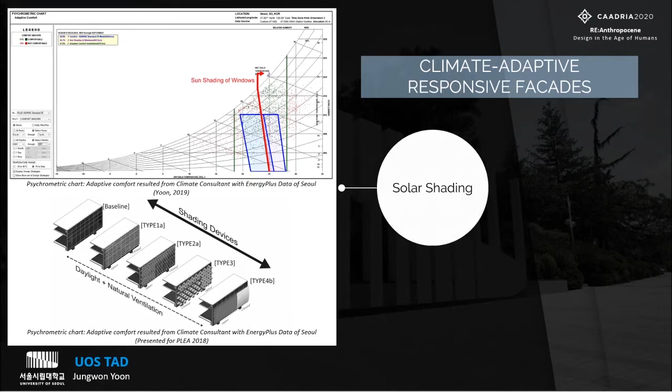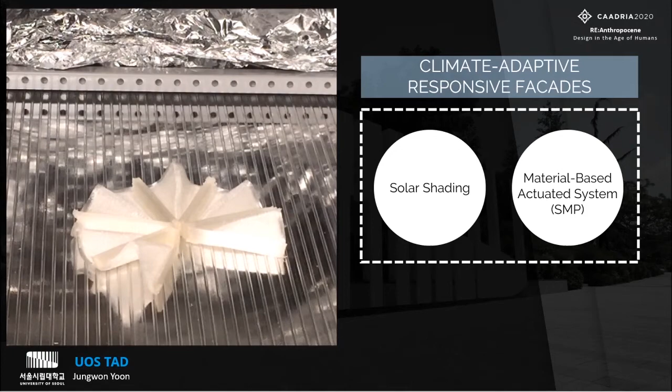The project started from the timely interest in climate adaptive responsive facades combining shading with a material-based actuated system in SMP. The basic principle is to apply SMP to the transformative shape-changing part. If the temperature rises above the specific transition temperature, the SMP becomes pliable and deformable to recover its pre-programmed shape. The pre-programmed shape is trained during the manufacturing process.

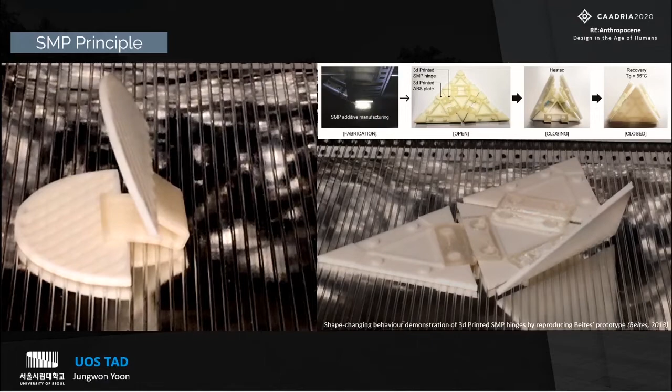In kicking off the project, we started the case studies of responsive facade design and categorized the examples into 4 types. The representative examples of 4 types were interpreted into SMP elements and experimented for 3D printing and behavioral tests. Of a number of prototypes, this study focuses on design and fabrication of SMP with a flapping mechanism resulting from bending wings. The first prototype is called blade.

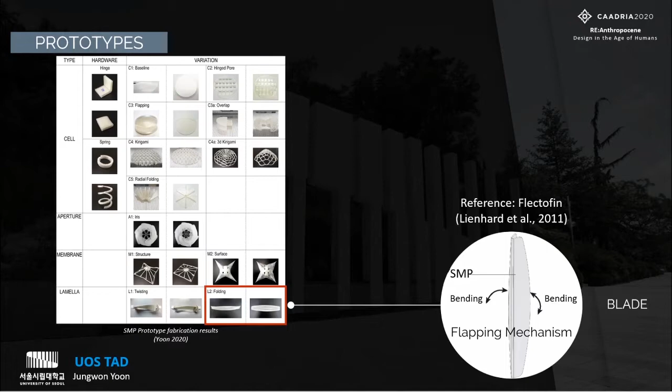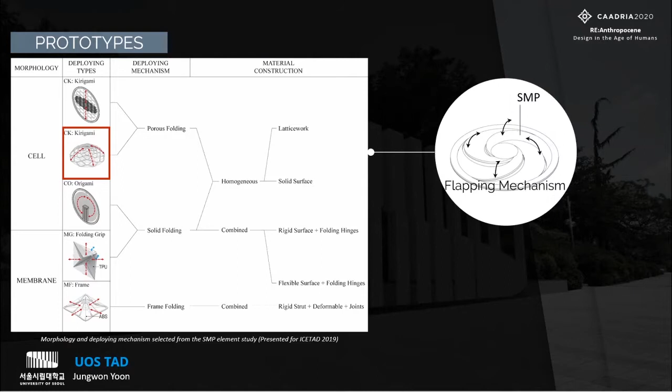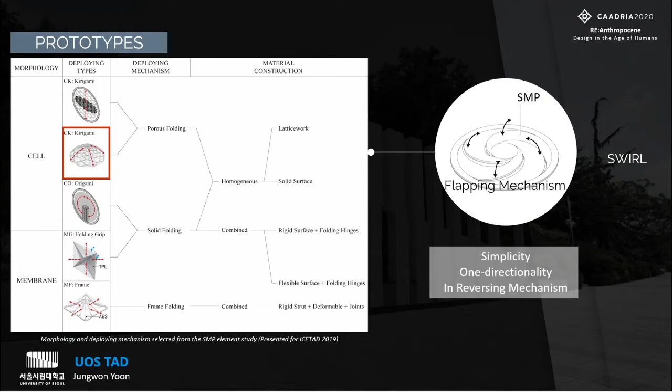Referenced from Flectofin, the second prototype is one of the deployable prototypes in various complicated geometries. The selected type named swirl is a radial arrangement of the 4 bending wings from blade. The design was selected due to its simplicity and one-directionality in reversing the closed shape into open positions. Therefore, 2 designs are discussed for the design to fabrication process and empirical and reiterative experiments.

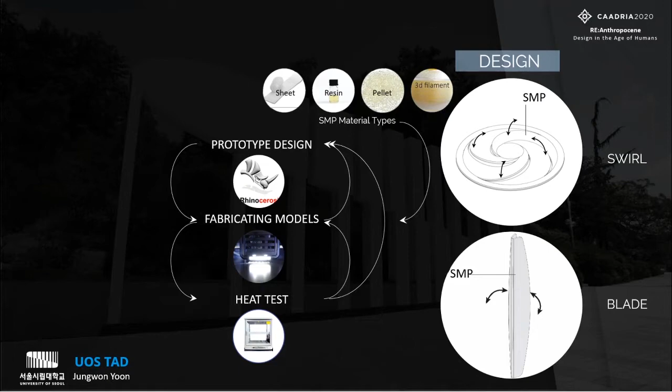In the process, the experiment results make us revisit the fabrication and design, while SMP material types also require recalibrations and procedural modifications. For rapid manufacturing and prompt feedback between design and fabrication, 3D printing was undertaken to fabricate SMP components. Cubicon Single Plus was used in our experiments.

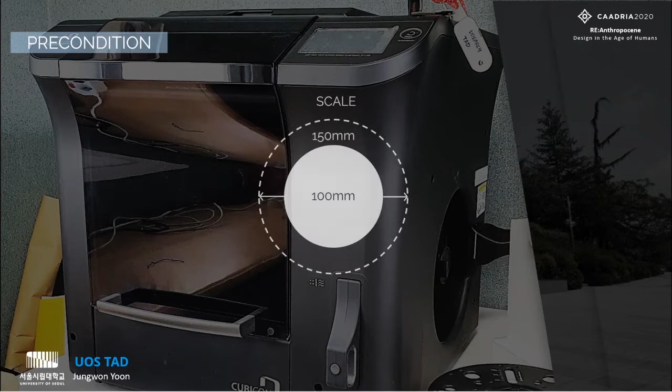SMP with different glass transition temperatures were tested for 3D printing. Also, the filament manufacturing process with SMP pellets was involved. Additionally, enlarging the printing size was another challenge to take. In the early stage of additive manufacturing, the commercially available filament in MM5520 was used.

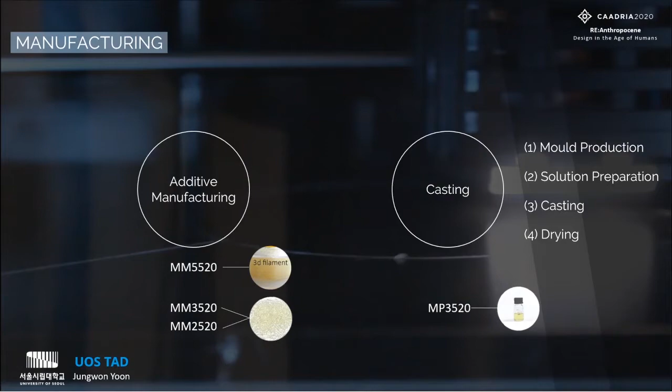To achieve more responsive SMP components in real temperature conditions, MM3520 and MM2520 were tested for 3D printing after making the custom filaments. Additionally, to verify the efficiency of 3D printing by comparing different manufacturing methods for SMP, casting was also experimented. Casting is proceeded in 4 steps. First, mold production, second, solution preparation, third, casting, and lastly, drying and curing.

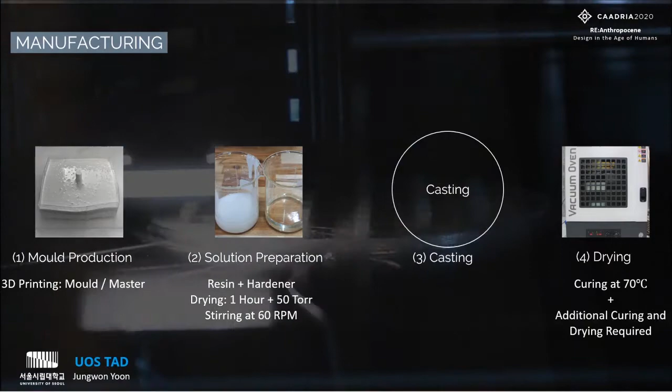In mold production, 3D printing was also applied to make ABS molds as well as to make ABS masters for silicone molds. In solution preparation, its resin and hardener should be dried for 1 hour at less than 50 torr before being mixed by stirring for 30 seconds at 60 rpm and being poured into the mold. From now on, I will share the design and manufacturing processes and results per type.

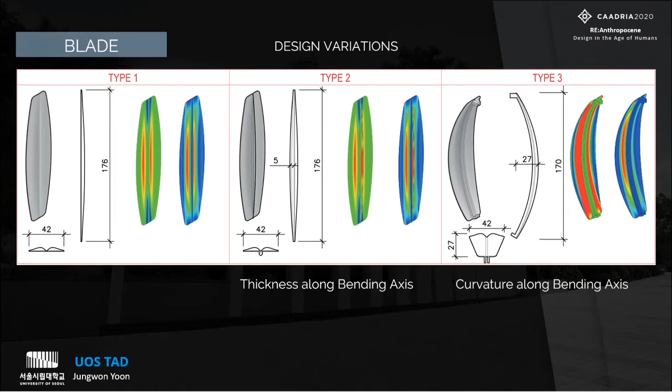First, blade. From our experiments, it was noted that the thickness along the bending axis would affect the behavioral performance and mechanical properties of the SMP model. Therefore, type 2 was determined to test the thickness along the axis. Type 3 was designed to test the influence of curvature along the bending axis upon the SMP deformation and responses.

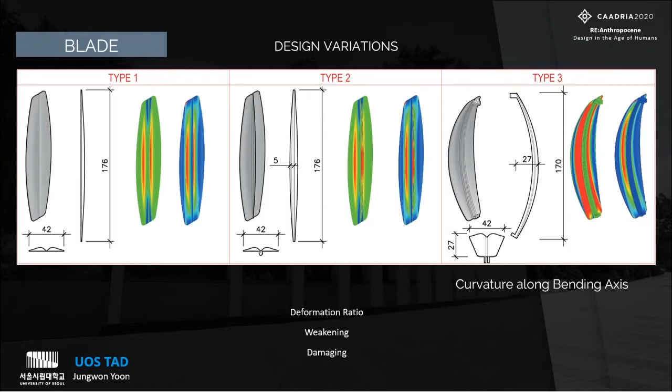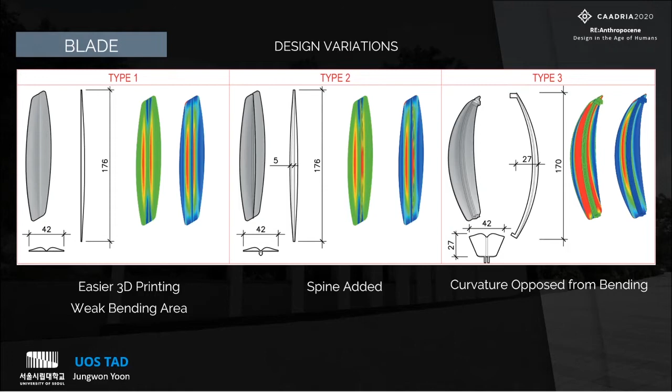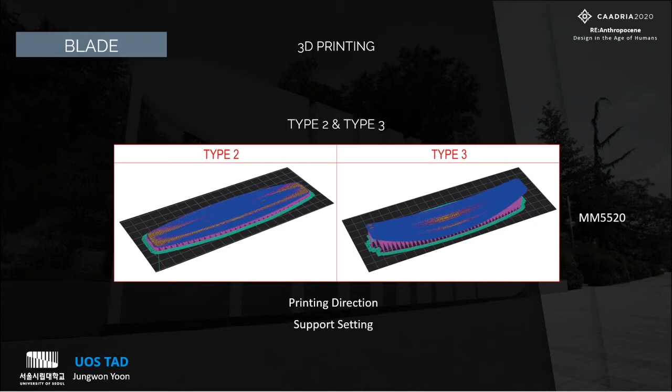In 3D printing Type 2 and 3, printing direction and support setting were important factors determined for the successful fabrication. It took 1 hour and 20 minutes for Type 2 and 4 hours for Type 3 to complete the 3D printing. In heat test, Type 2 showed the successful transition between programming and shape changing.

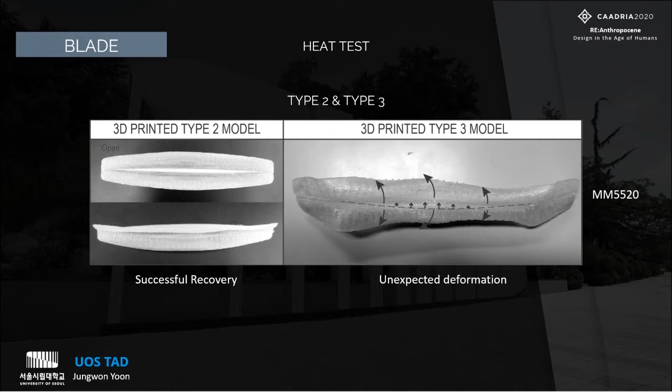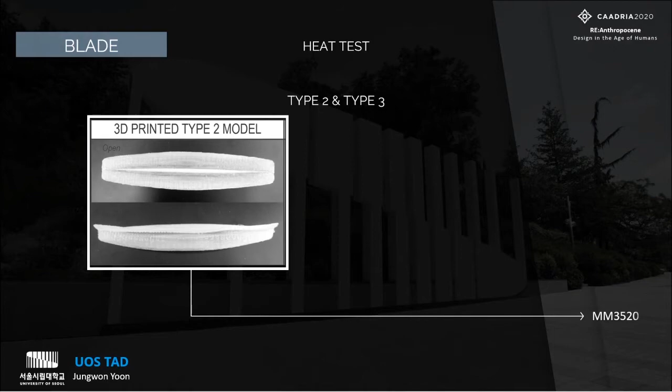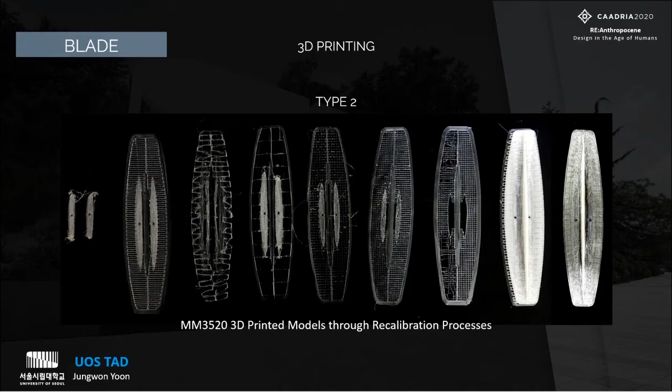In 3D printing with the MM3520, many recalibration processes were taken to achieve the successful setting. Also, in heat test, the MM3520 showed much more prompt response to the temperature and quicker shape changing. From this experiment, we can secure the 3D printing setting of our 3D printer for MM3520.

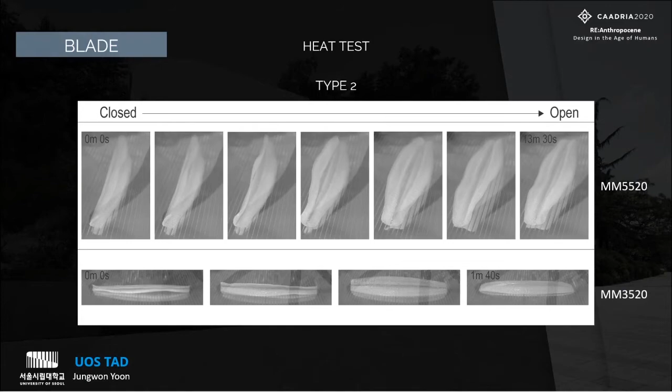For the more complicated type swirl, we also conducted a series of trials for 3D printing. Due to viscosity of a hot melt SMP and sensitivity of the printer, the process was halted many times. However, by human handling actions to prevent the SMP clog in the nozzle and recognition errors against the filament, the final production could be accomplished.

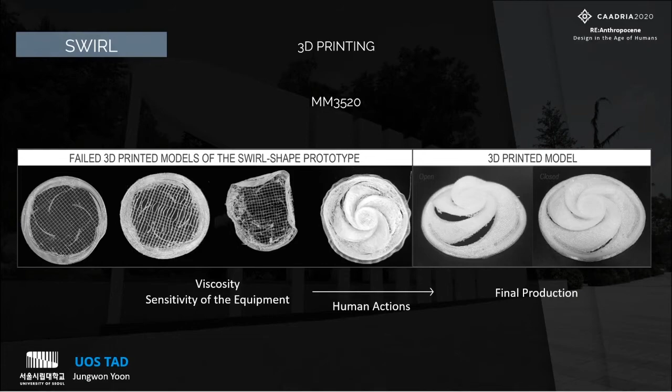However, in scaling up the model size from 100 mm to 150 mm, previously unknown matters stood out. After failure in 3D printing, the design model was reviewed and fixed. To verify the 3D printability of the form, ABS and TPU were applied for 3D printing of the same model. But due to the SMP material properties, 3D printability was completely different from others.

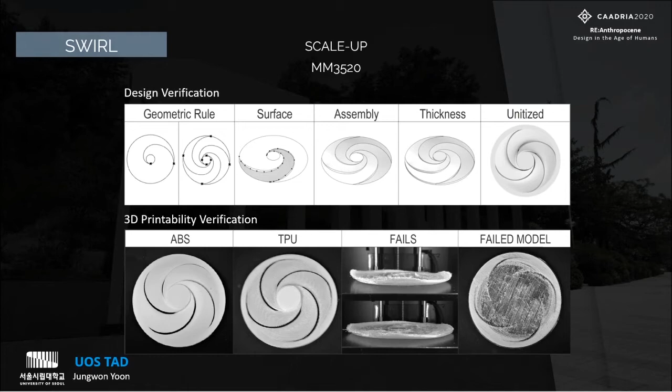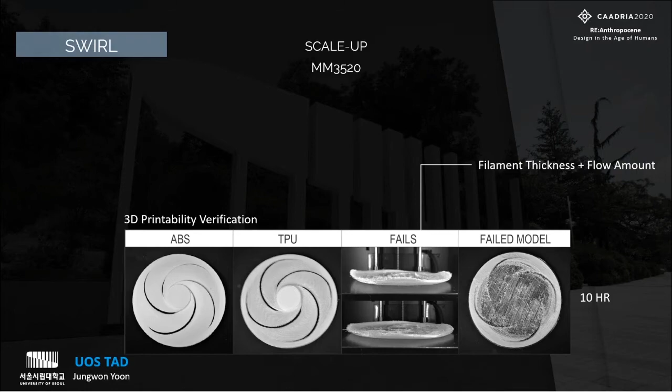There are several issues to tackle, which include mounting method of the model to the bed plate, replacement of support materials to other solid and hard materials, replacement of the 3D printer machine, and the review of filament thickness and flow amounts from the nozzle. Without resolving problems by human surveillance and support, it takes 10 hours to print the 150 mm model, which is not desirable in rapid prototyping.

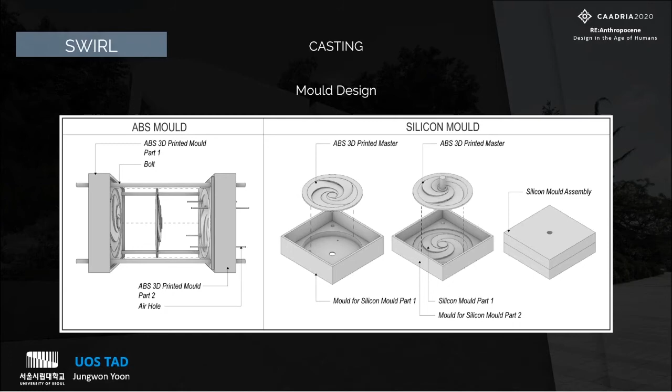With the concern and doubt on 3D printing, we conducted SMP resin casting experiments. Molds were made in 2 different materials and processes. However, the SMP resin models made of silicone mold showed problems. Due to the volume of the prototype, the curing time for SMP increased significantly from the guided duration up to 3 days. Also, the complicated geometry turned out as not adequate for casting.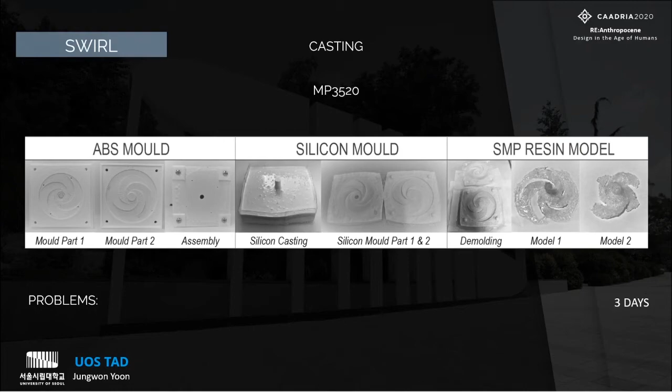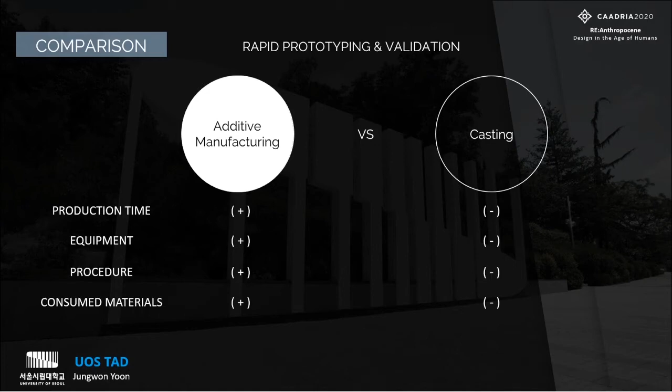From experiments with the 2 different manufacturing methods, although 3D printing was difficult to conduct for SMP models, it was demonstrated that 3D printing is superior to casting from its advantage of production time, required equipment, procedure, and consumed materials. This comparison informed us to revisit the system and the SMP design.

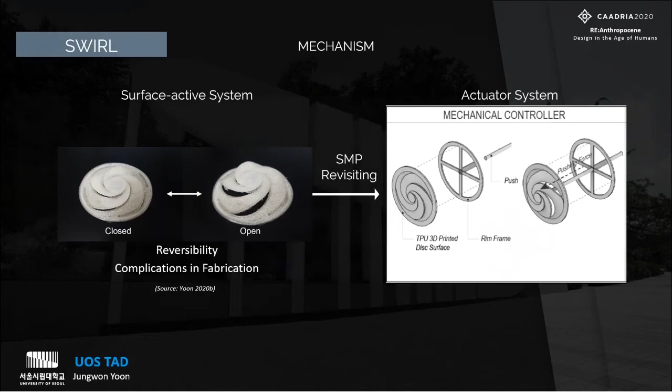Swirl was designed simply as the surface-active system, but in consideration of reversibility of the shape and complications in fabrication, the prototype was redesigned to have an SMP actuator with other flexible surface materials. As shown in figures, the system was more divided into elements to utilize the material-based actuator and the simple mechanical control to program and revert the shape changing.

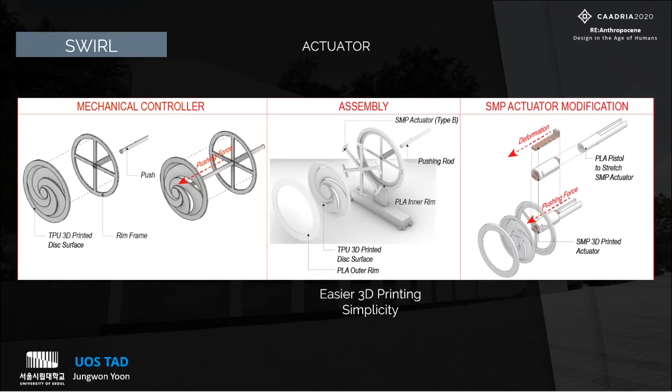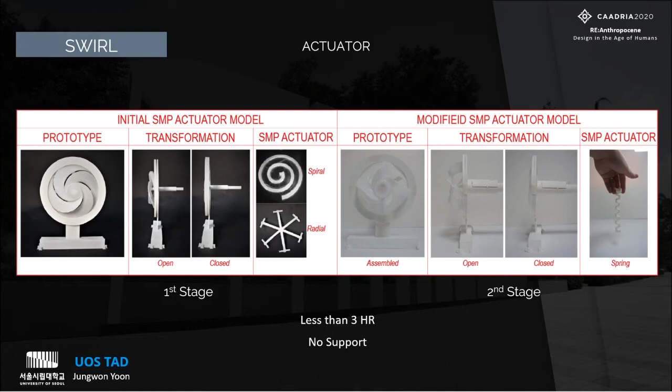The designed SMP actuators were simple and easy to be 3D printed, but this again throws a question on the effectiveness and appropriateness of the design outcome and the manufacturing method. Nevertheless, throughout the whole process from blade to swirl, from surface active to actuator system, the last prototype was the design which achieved the desired size and kinetic movements.

From the series of experiments and results, we could demonstrate shape changing and reversibility of MP3520 prototypes, which makes it convincing to apply MP3520 to a climate-adaptive building skin. However, we still need a better solution for reverse programming. Besides, the performance and environmental effects of shading elements should be validated by simulations and mock-up tests. We also could review selection of fabrication methods rather than blind pursuit of 3D printing.

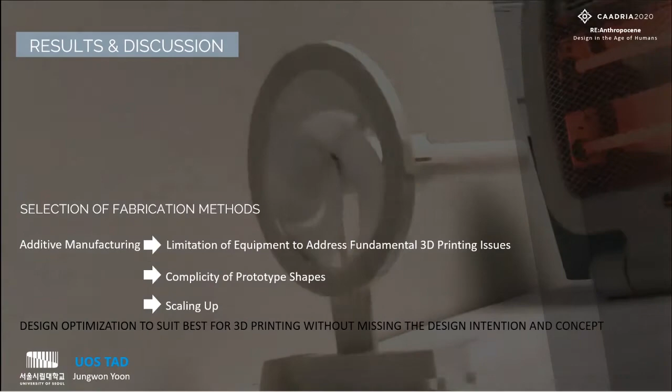From this study, we could check many challenges to overcome. The limitations of current 3D printers should be resolved to tackle fundamental 3D printing issues. Also, the shape of the prototype should be carefully considered to take advantage of 3D printing. In addition, the scale of the 3D printed components should be cared for optimization of time and effort. Therefore, it is rational to consider design optimization, which can be best suitable for 3D printing without missing the design intent and concept.

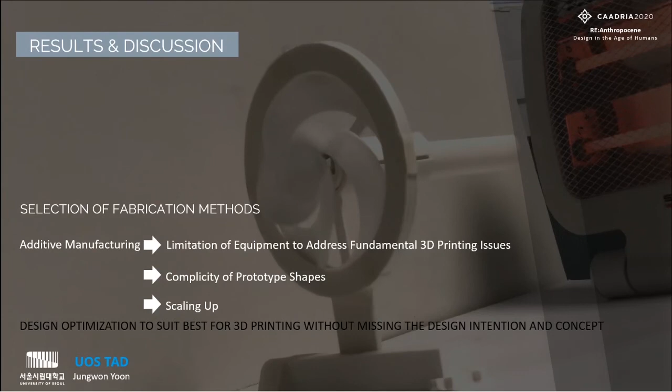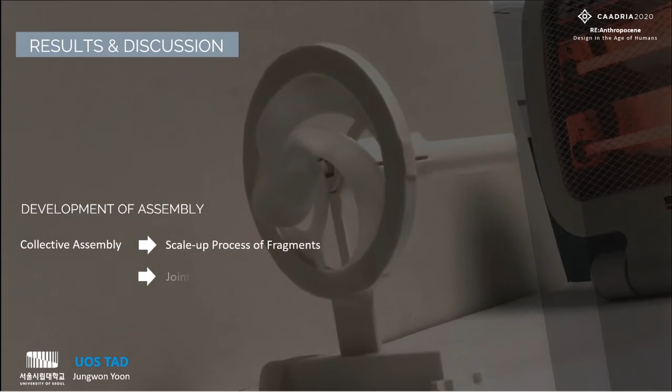Lastly, to make the full-scale components or an installation using SMP elements, it is necessary to consider the assembly. Differently from the fabrication study of single components, joints and connectors are critical.

Let me conclude this presentation by summarizing our findings. We presented a bottom-up approach toward thermo-responsive smart materials and climate adaptive facades by focusing on very specific forms and mechanisms, as well as by experimenting and understanding SMP additive manufacturing. The final assembly, which is a kit of parts, presents a promising shape-changing behavior and deploying performance.

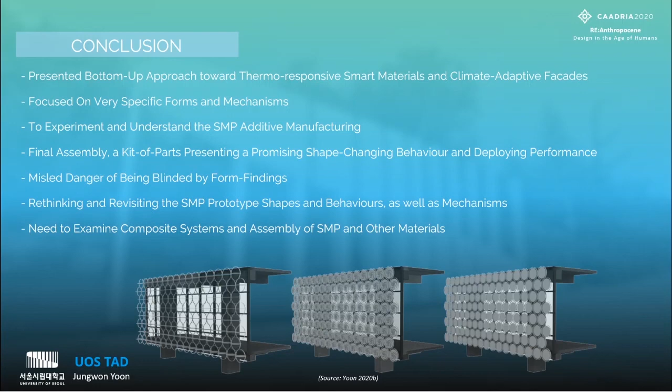However, a form-finding approach may mislead the design direction. Rather, it is helpful to rethink and revisit the SMP prototype shapes and behaviors as well as mechanisms after fabrication tests. To further develop the SMP prototypes, it is needed to examine composite systems and assembly of SMP with other materials.